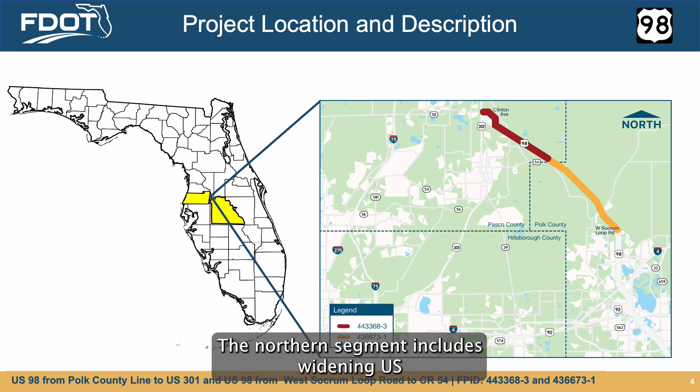The northern segment includes widening US-98 in Pasco County to a 4-lane divided roadway from the Polk County line to north of Townsend Road, and realigning US-98 from north of Townsend Road to US-301. 4 new roundabouts will be built, 3 new signalized intersections will be constructed, and existing bridges will be replaced with twin bridges.

The southern segment includes widening US-98 in Polk County from a 2-lane undivided roadway to a 4-lane divided highway from West Socrum Loop Road, Hall Road, to County Road 54, Pasco County line. 2 roundabouts will be built at Big Cypress Boulevard and State Road 471. Shared use paths will be constructed on both sides of the highway from West Socrum Loop Road, Hall Road, to just north of Rock Ridge Road.

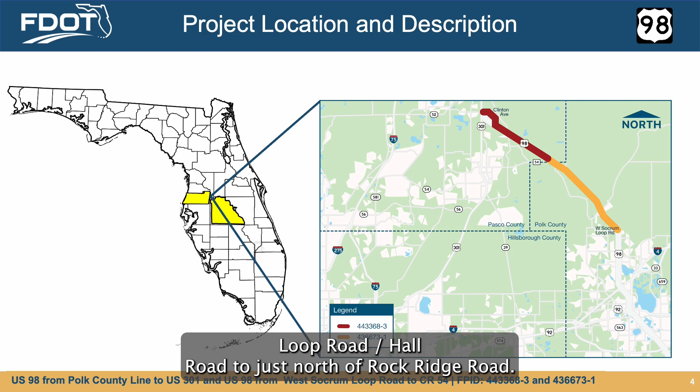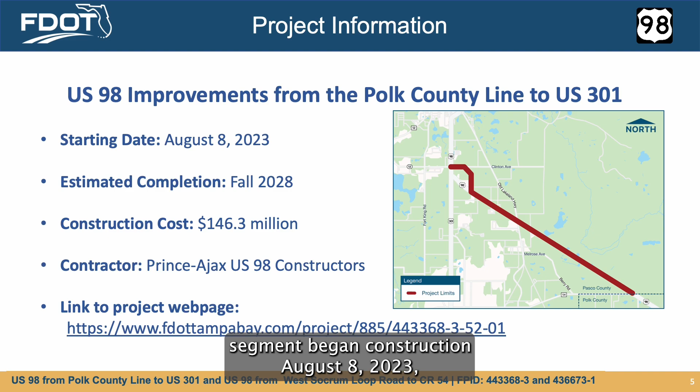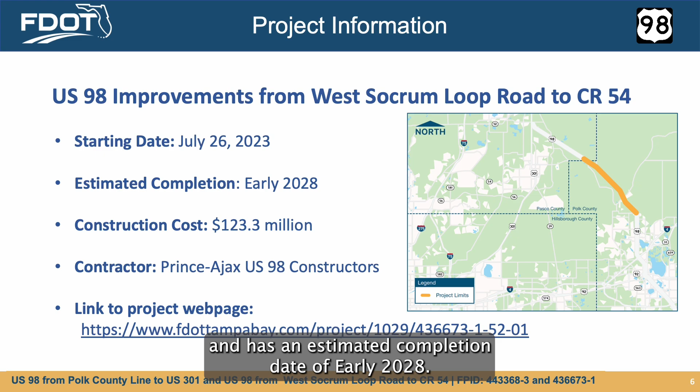The Pasco County segment began construction August 8, 2023, and has an estimated completion date of fall 2028. The Polk County segment began construction July 26, 2023, and has an estimated completion date of early 2028.

This design-build project will widen US-98, creating a 4-lane divided roadway from the Polk County line to north of Townsend Road, and realign US-98 from north of Townsend Road to US-301. The realignment allows US-98 to align with Clinton Avenue, which became the new State Road 52 at the intersection of US-301 in February 2023. 4 new roundabouts will be built, including one at the new intersection of US-98 and Clinton Avenue east of US-301. There will also be 3 new signalized intersections.

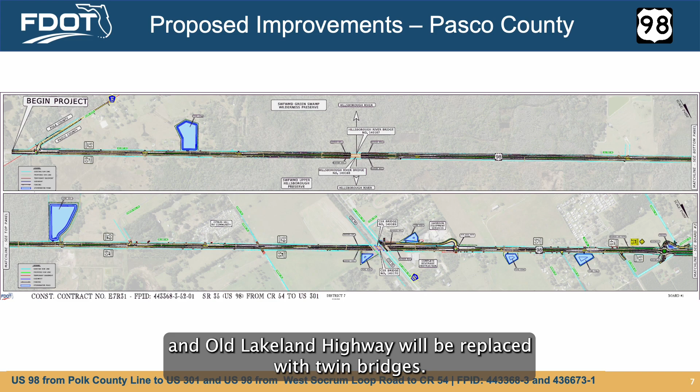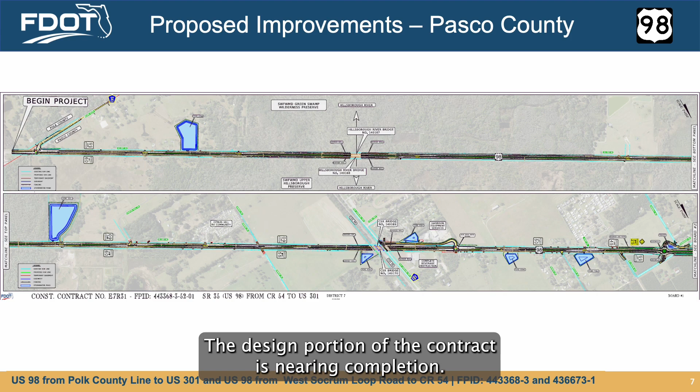The existing bridge over CSX Railroad and Old Lakeland Highway will be replaced with twin bridges. There will be a 6-foot sidewalk on the east side of the road and a 10-foot wide shared use path on the west side of the road that will connect to the Withlacoochee State Trail on US-301. The contractor is responsible for finalizing the design plans and building the improvements. The design portion of the contract is nearing completion. Construction officially began with clearing activities on February 12, 2024.

This design-build project will widen US-98 from a 2-lane undivided roadway to a 4-lane divided highway from West Socrum Loop Road, Hall Road, to the Pasco County line just south of County Road 54 in Pasco County. The contractor is responsible for finalizing the design plans and building the improvements. The final design portion of the contract is working towards completion. Construction began January 3, 2024 for project work items, such as clearing and erosion control, that have completed and approved plans. 2 roundabouts will be built at the US-98 intersections at Big Cypress Boulevard and State Road 471.

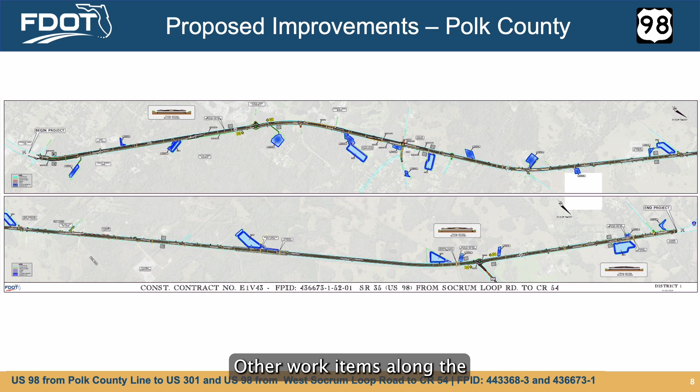Shared use paths will be constructed on both sides of the highway from Hall Road, West Socrum Loop Road, to just north of Rock Ridge Road. Other work items along the corridor include drainage improvements, wildlife crossing under the roadway, and pedestrian crosswalks at the Rock Ridge Road and Big Cypress Boulevard intersections.

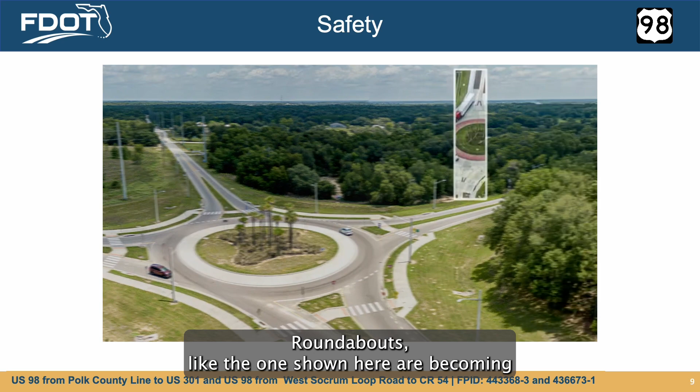Do you recognize this intersection? Roundabouts like the one shown here are becoming very popular throughout Florida and the United States. For many residents, however, a roundabout is a new concept. As a new driver, it is necessary to understand how this traffic pattern works and how to navigate it. So, what exactly is a roundabout? A roundabout is a circular intersection that is safer and more efficient than traditional intersections.

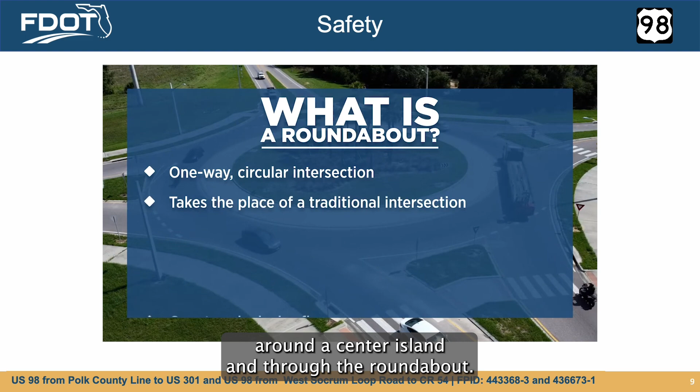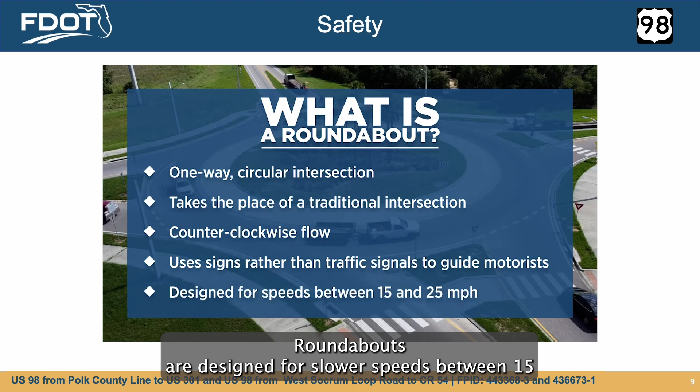Motorists travel one way in a counterclockwise direction around a center island and through the roundabout. Unlike traditional intersections, a roundabout uses signs rather than traffic signals to guide motorists to their destination. Roundabouts are designed for slower speeds between 15 and 25 miles per hour, which makes them a safer intersection to navigate. A roundabout is designed to accommodate all kinds of users: passenger cars, motorcycles, emergency vehicles, recreational vehicles, and tractor-trailers. Even pedestrians and bicyclists use roundabouts.

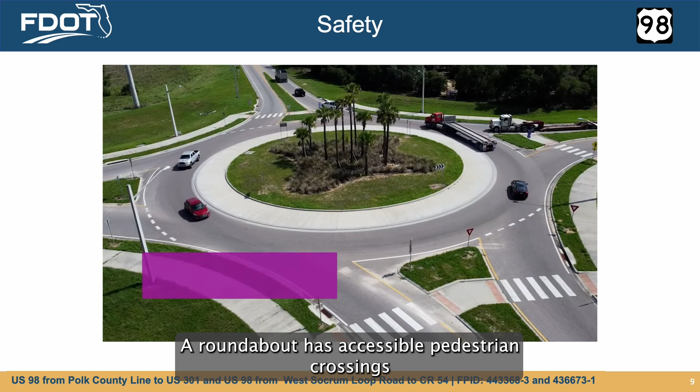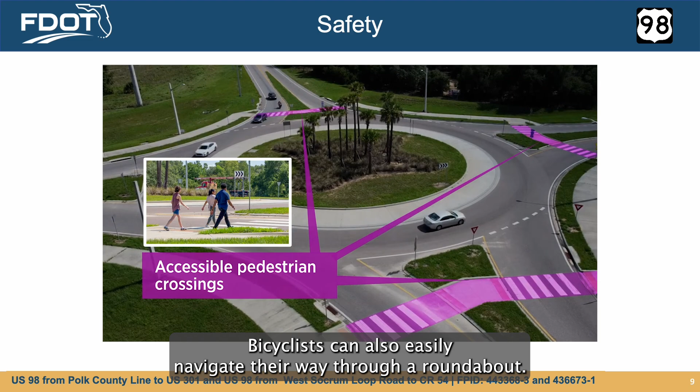A roundabout has accessible pedestrian crossings and triangular islands between lanes for pedestrians to wait if they choose to cross one direction of traffic at a time. Bicyclists can also easily navigate their way through a roundabout. The inner portion of a roundabout serves as an apron or buffer for large trucks, giving them space to make wide turns.

So, let's take a step-by-step walk through how to properly navigate a roundabout. As you approach a roundabout, you'll see a yellow "Roundabout Ahead" sign. Slow down. Most roundabouts have speed limits of 15 to 25 miles per hour.

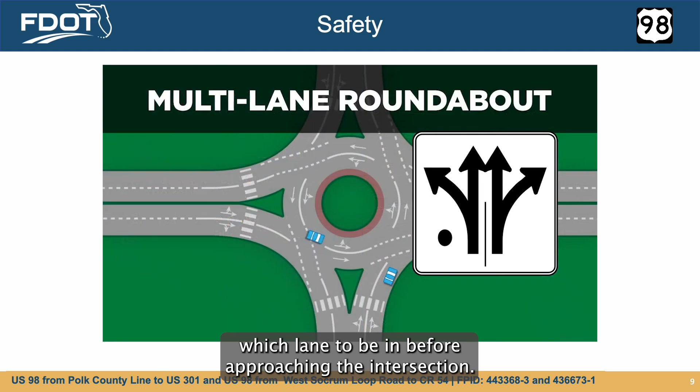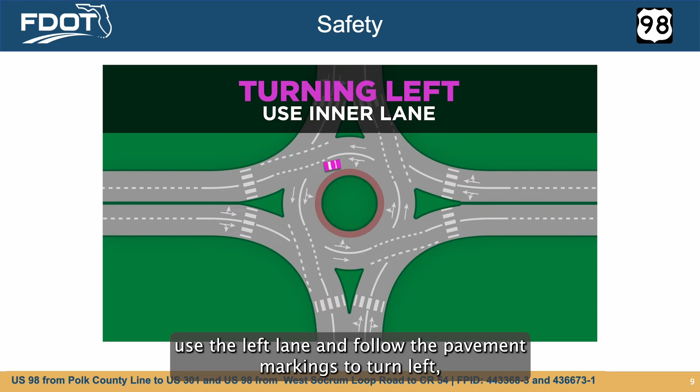If the roundabout is a multi-lane roundabout, it is important to think of it like a traditional intersection. Just like a traditional intersection, a motorist chooses which lane to be in before approaching the intersection. You will see a sign showing which lanes to use for each traffic movement. Use either lane to go straight, use the left lane and follow the pavement markings to turn left, and for right turns, use the right lane.

Now that you're in the correct lane and your speed has been adjusted, yield to pedestrians and bicyclists in marked crosswalks. If you see someone crossing or about to cross, make a complete stop before the crosswalk to let them pass. When the coast is clear of pedestrians, pull up to the roundabout and look left. Yield to all traffic already in the roundabout. They have the right of way, and it is your job to wait for your turn.

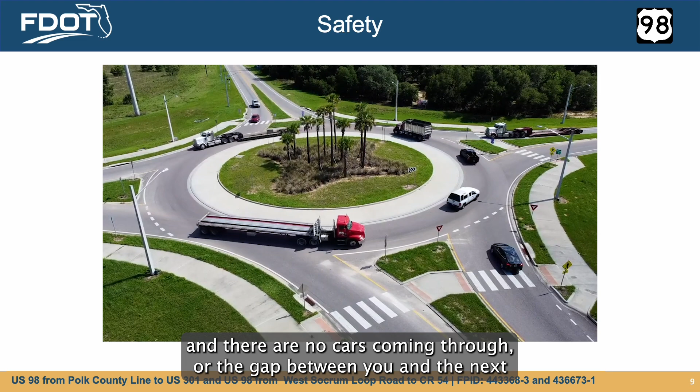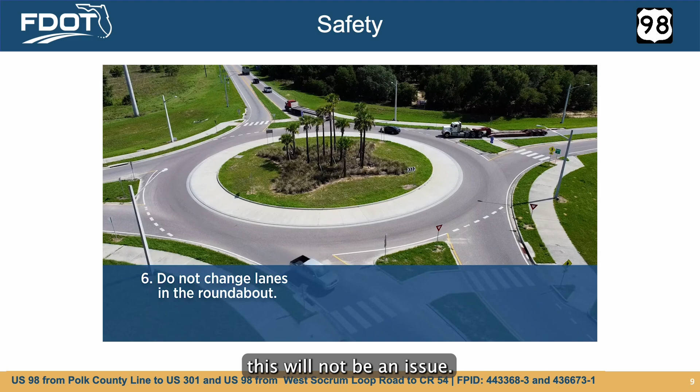When it's your turn, and there are no cars coming through, or the gap between you and the next car is large enough, enter the roundabout. Once you're in the roundabout, do not change lanes. For single-lane roundabouts, this will not be an issue. You should never stop in a roundabout. The only time it is permissible to stop in a roundabout is when you are yielding to pedestrians or bicyclists. Once you reach the desired exit point, signal and leave the roundabout. Remember, you're in the roundabout, so as you exit, you hold the right of way.

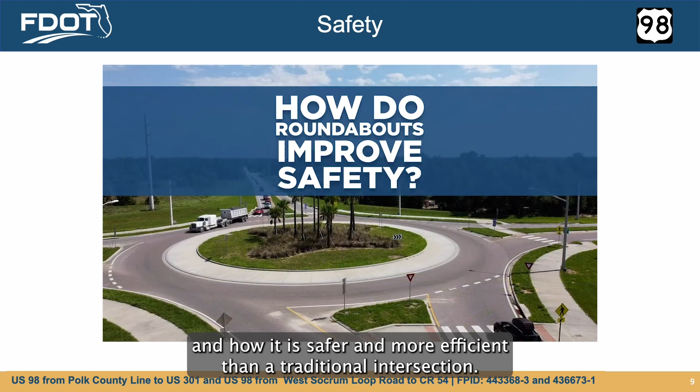Now that you know what a roundabout is and how to use it, let's take a closer look at how a roundabout improves safety and how it is safer and more efficient than a traditional intersection. Drivers cross paths as they travel through or turn from one route to another. Places where different paths separate, cross, or join are known as conflict points, and these are always present at intersections. Limiting the number of conflict points at an intersection not only reduces the frequency and severity of crashes, but also improves the overall operation and mobility of an intersection.

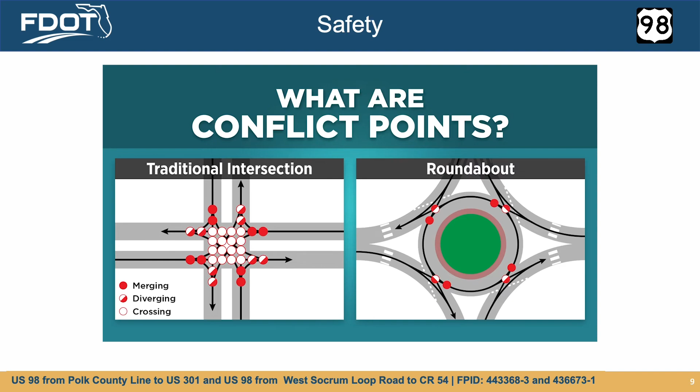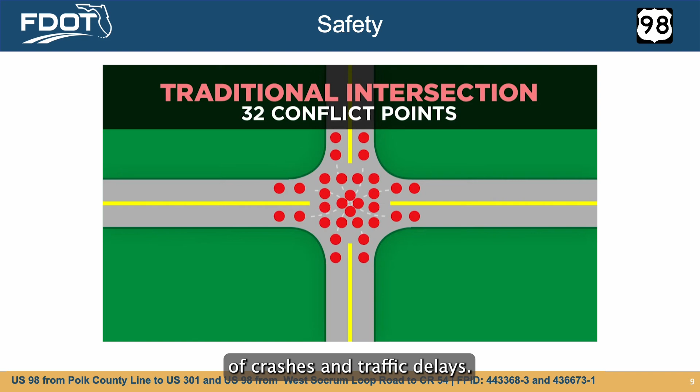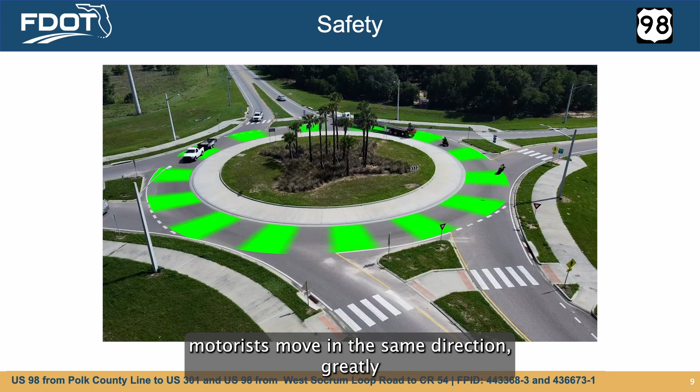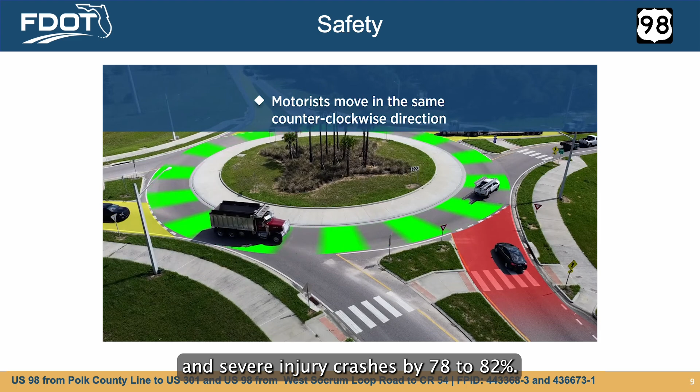The traditional intersection has 32 conflict points. With all the merging, diverging, and crossing required, a traditional intersection is more prone to the likelihood of crashes and traffic delays. A roundabout reduces these conflict points to 8. By removing right-angle conflicts, a roundabout lessens the severity of crashes that occur in this type of intersection. Incidents that do occur in a roundabout are at low speeds and are typically sideswipe glancing collisions. In a roundabout, motorists move in the same direction, greatly reducing the chance of a potential head-on collision. In fact, roundabouts have been shown to reduce the number of fatal and severe injury crashes by 78 to 82%.

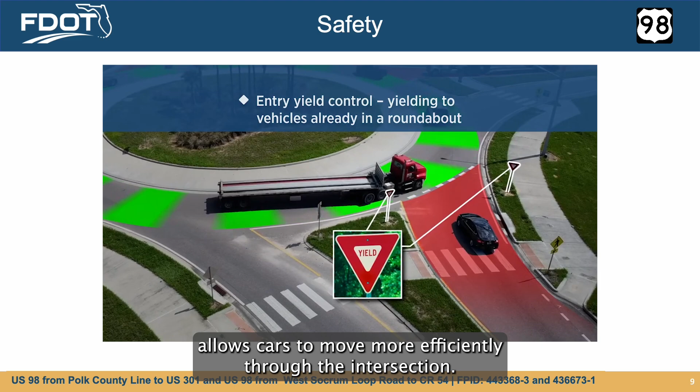Another safety feature of a roundabout is the truck apron for wide-turning vehicles. Here's a video showing how an apron can help a truck safely navigate a roundabout. A roundabout reduces traffic delays by about 20%. By eliminating a lot of the waiting that takes place at normal intersections, a roundabout shortens travel times for both drivers and pedestrians.

One final tip for roundabout safety and proper navigation is yielding to emergency vehicles. If you have not entered the roundabout, pull over to the right and allow the emergency vehicle to pass. But if you have already entered the roundabout, continue to the closest exit and pull into it to allow the emergency vehicle to pass.

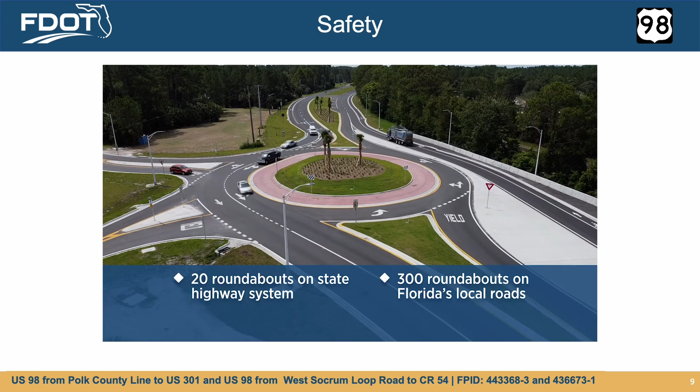There are approximately 20 roundabouts operating on the Florida State Highway System and over 300 roundabouts on Florida's local roads. It's important that as a new driver, you are informed and prepared to navigate these innovative and efficient traffic patterns.